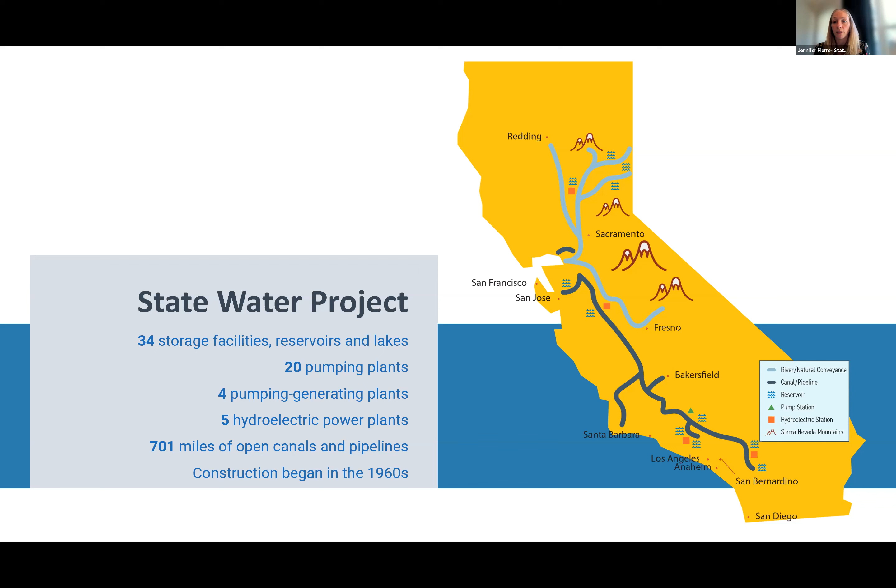Just as a quick background, I'm sure many of you know this, but just to orient ourselves, this is a cartoon depiction of the State Water Project. We conserve water in Lake Oroville up here, and it's delivered down the Feather River to the Sacramento River into the Delta. Then this is the South Bay Aqueduct that takes that water to Alameda County and other agencies in Northern California. From there it moves farther south into the Central Coast branch, over to Kern, East Branch, West Branch, and LA. One thing I want to point out is that we have a huge number of storage facilities, pumping facilities, and hydroelectric generation. So while we're often very focused on the Delta and on Oroville facilities, this is the largest state-owned water utility in the world.

Unfortunately, the Delta is not in a good state. I think environmentally and from a water supply perspective, it's continued to be a major challenge, and that challenge just continues to get harder and harder as the effects of climate change continue to increase and impact how we're able to operate in the Delta.

DWR estimates that the reliability of the State Water Project will continue to drop over the next 20 years, and it already has dropped about 20%. This is due primarily to climate change impacts like sea level rise, temperature management required across the projects, and other regulations occurring within the Delta itself. We'll talk a little bit more later about Delta conveyance, but this is the reason for the Delta Conveyance Project: to address these sorts of issues occurring in the Delta.

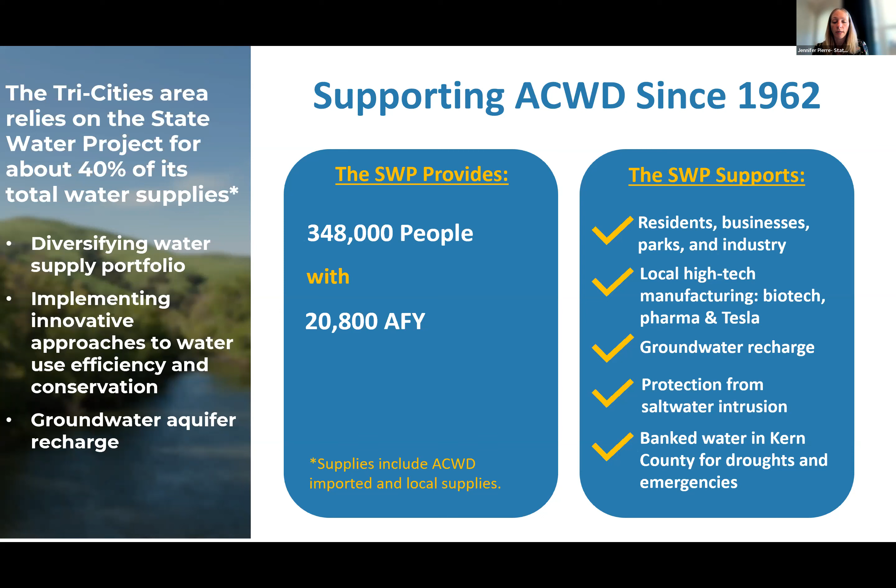So who are the state water contractors? My organization represents each of the public water agencies, including Alameda County Water District, who contract with the Department of Water Resources to participate in the state water project. The department owns the state water project and holds the water rights, but we, as in you and other agencies, pay all of the costs associated with it. So we work very closely with the Department of Water Resources. They are the owner and operator, but we have a very keen interest in how it's operated and maintained, to ensure both public safety and water supply at an affordable cost.

There are 29 public water agencies that contract with the department for participation in the state water project. 27 of those are members of the State Water Contractors organization. The two that aren't are up in the north: Butte County and Plumas County. The primary reason is that their issues tend to be very different than the issues for others that are diverting water from the Delta, so there's not a good alignment for them to participate in the type of work that we do.

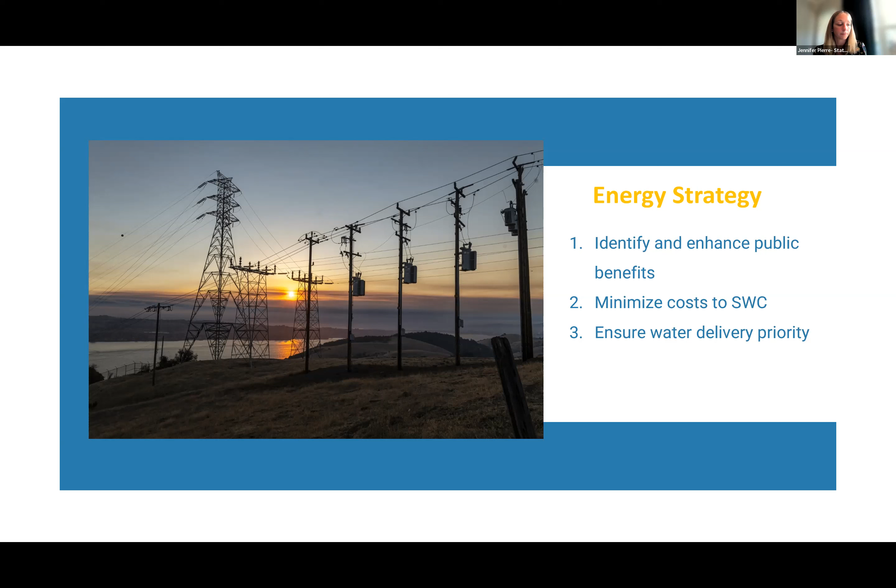Before I go to questions and answers, I want to share this. Coming back to the Delta Conveyance Project, I didn't want to leave without sharing this. This is a very quick 2-minute video that explains the project.

The Sacramento-San Joaquin Delta is the hub of California's water supply and a linchpin of California's state water project, where water from the Sierra Nevada... Jennifer, I think we're not seeing it on the screen here. Oh, that's okay, maybe I don't know how, was it working when it was smaller? Exit. Okay, maybe exit the PowerPoint and click the link. Let me go to... give me a second. I will go to my website. I don't think that worked. Can you see it now? Yes, it's small, but we can see it. Okay, what about this? Perfect, okay, I'll start from the beginning, sorry about that.

The Sacramento-San Joaquin Delta is the hub of California's water supply and a linchpin of California's state water project, where water from the Sierra Nevada mountains gathers to be delivered to 27 million people that rely on the water to run their homes, farms, and businesses. But the state water project's outdated infrastructure in the Delta is at serious risk from threats like sea level rise, earthquakes, and levee failures. As the state's rainfall increasingly comes in big flashy storms in between extended dry periods, we must invest in modern infrastructure that allows us to capture and store water when it's wet for use when it's not. Let's face it, our climate is changing and we need to change with it.

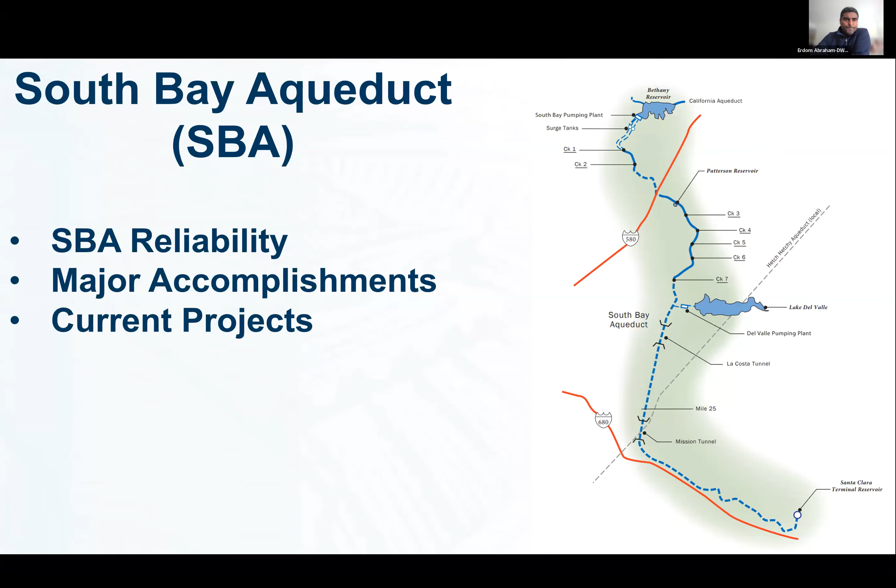So I'll start with the power supply for the South Bay system. DWR at Delta Field Division has 2 power sources that we get from PG&E. We have redundancy on the main power supply. It's a 230 kilovolt power that supplies banks. And from these 2 lines, the facility can run basically with 1 power supply, but we have redundancy on that system. And then we have a 230 kV bus that actually supplies power specifically just to South Bay.

And from this 2 line, we have step down transformers. Again here we have 2 redundant transformers. South Bay can really run with just 1 transformer, but we do have a second backup power transformer, or if you want to take out 1 unit for service, we have that flexibility as well. So from this 2 transformer, the power runs through a 69 kV transmission line. Basically, we stepped it down from 230 to 69 kV. And then once it gets to the South Bay pumping plant, again here we have a redundant transformer that steps down from 69 kV to 4160 that provides power supply to all the units here in South Bay pumping plant.

Again, here we can run the entire facility with one transformer. The second transformer is always a backup, or we can have half of the plant run through one transformer and the other half through the second transformer.

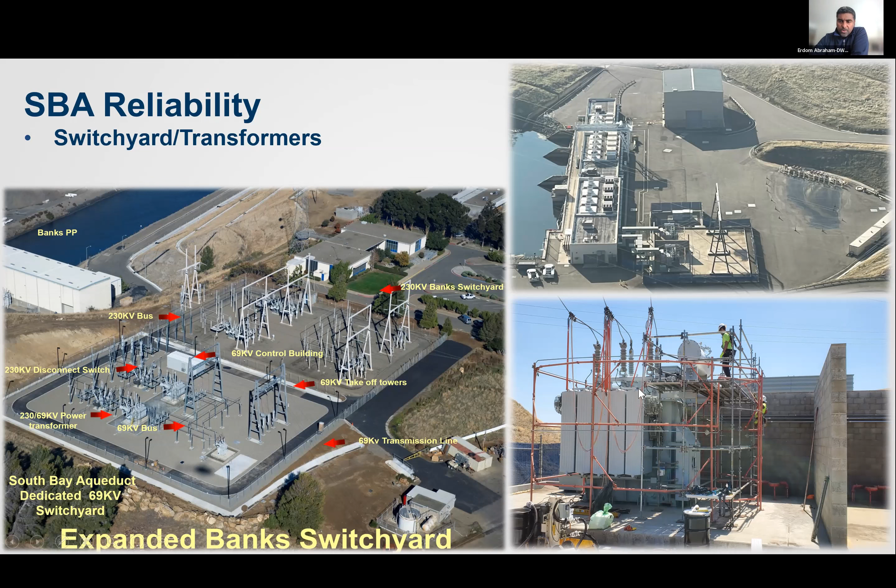This is just an example to show you when we had a refurbishment work done on the transformer, we had the second transformer providing power to all the South Bay units. We just wanted to provide a little bit more info in terms of power redundancy at the pumping plant.

Moving on to the units, the plant has 13 units to provide power and water supply to the South Bay system. The collective capacity for all the units is about 511 cubic feet per second. The maximum design capacity for the pipeline system and the canal is about 380 CFS, so we have almost about 140 CFS spare.

That was because Zone 7 was planning to construct a pumping plant by Dyer, and that did not happen. So we still have that additional CFS available for South Bay water contractors, but we can't push more than 380 CFS at this point. In addition to the spare units, we also have unassembled units ready to replace any unit that fails during normal operation.

So we have about 3 units on standby, which are disassembled and kept in a storage facility that we can put into service anytime. This provides a little bit more information in terms of the flexibility we have in the pumping plant.

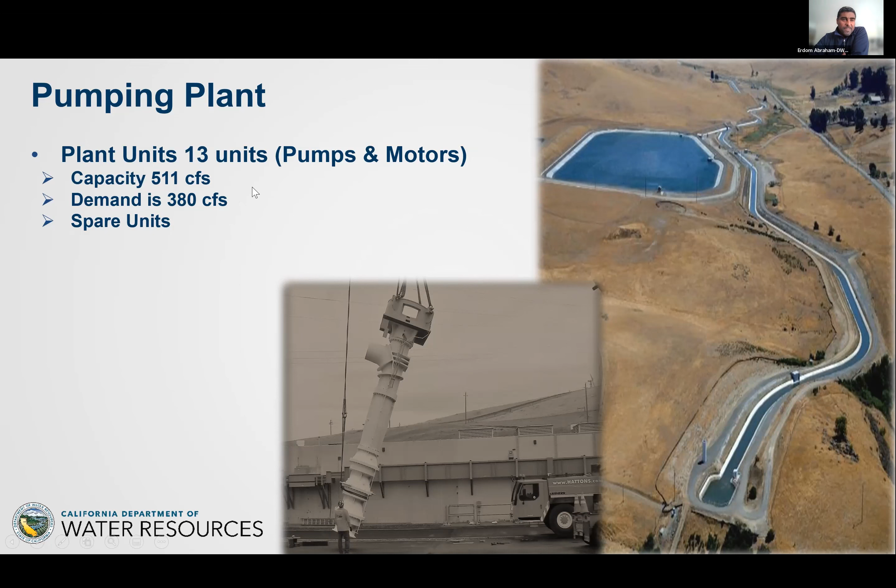Moving on to the conveyance facilities, South Bay was constructed almost 60 years back, but we do have a good condition assessment program where we inspect the pipeline and conduct aerial surveys to ensure construction, development, or private owners do not encroach into our facilities without proper permits or notification.

Typically what it does is increase the coefficient of friction, and flow through the pipeline is reduced by some number. This typically affects the pipeline downstream of Bayside. For example, for Santa Clara, the maximum design capacity is 184 CFS, but we cannot push 184 CFS because this lining is actually a little bit rougher. So that's something we continuously work to remove this material whenever we get an opportunity or when we do the condition assessment.

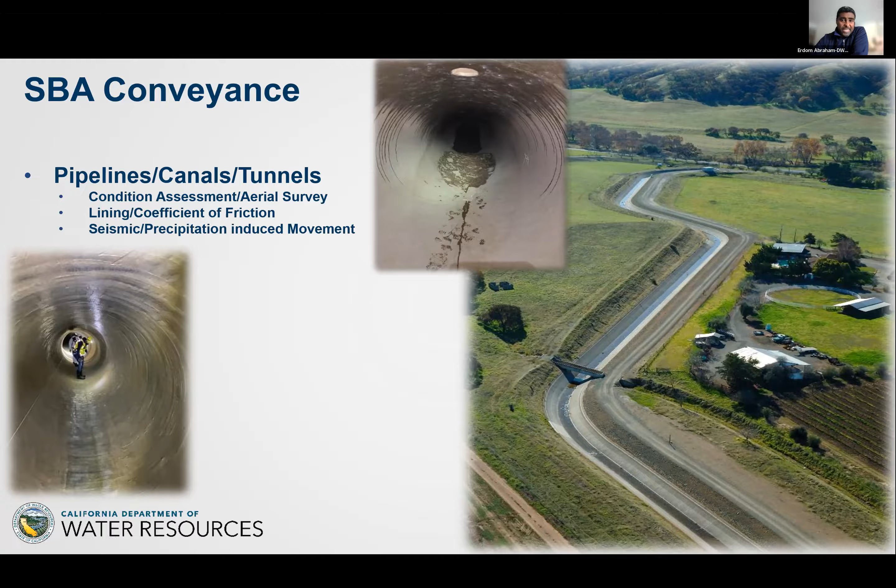The other issue we typically have is sometimes seismic or precipitation-induced movement. This again impacts majority of the Santa Clara pipeline, nothing on Valley Water or ACWD side. We don't have that much significant issues, but most of the Bayside, all the way to Santa Clara terminal tank, we have some dormant landslides. These are actually 3 dormant landslides we're currently studying: milepost 36.3, milepost 37, and milepost 38.

We're consistently putting in instrumentation to ensure this landslide is not active and moving.

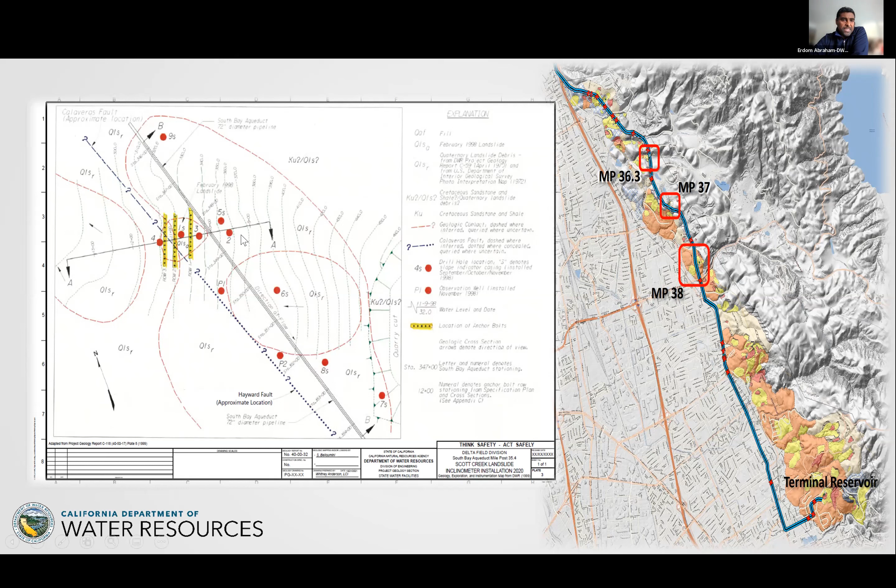So again, this is on Santa Clara. Most of the landslides are actually located below Bayside Valve, but we continuously monitor this red dotted line. These red dotted points are instrumentation for real-time monitoring. It gives us good information as precipitation happens or seismic activity happens - we get real-time data.

This is one specific example for one of the instrumentation sites. Right after the December rainfall, in January we started seeing a little bit of movement, and this was actually recorded in real time - this was back in January 19th. We got a signal that the hillside actually moved about a quarter of an inch. Then back in February 24th, we got another signal that it moved by another quarter inch. Typically our pipeline is shown here in blue, and the instrumentation lets us know which section actually moved. So this is something we're actively monitoring on a real-time basis.

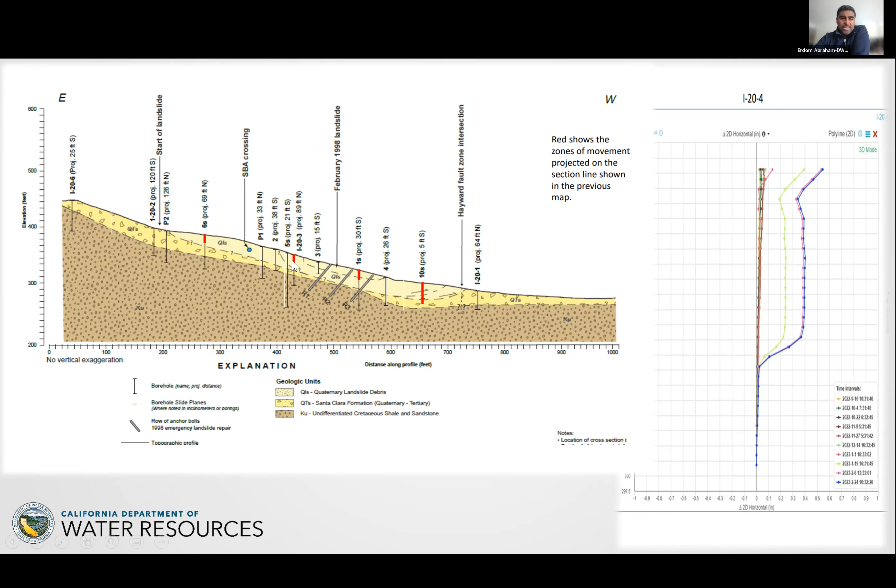This is just an example.

Some of the key accomplishments we've achieved in the last 2 years, especially on Bethany Dam: we had a series of burrowing animals creating issues along the face of the dams. Due to environmental challenges in the state of California, we were not able to permanently remove the rodents from the face of the dams.

So one of the measures we took was installing a steel wire mesh that is rubber coated. We removed about 2 feet of material from the face of the dam and applied this wire mesh so that squirrels or rodents do not burrow into the face of the dam. We armored the face of the dams, and finally achieved a well-protected dam so that burrowing does not occur there.

The other issue was on the aqueduct, especially during the drought when we're not pushing a lot of water. In summertime heat, we get a lot of algae bloom and aquatic weed that affects the screens we have at check 2 and check 7. These are transition locations between the canal and the pipeline, where we typically have these 2 check structures with traveling screens.

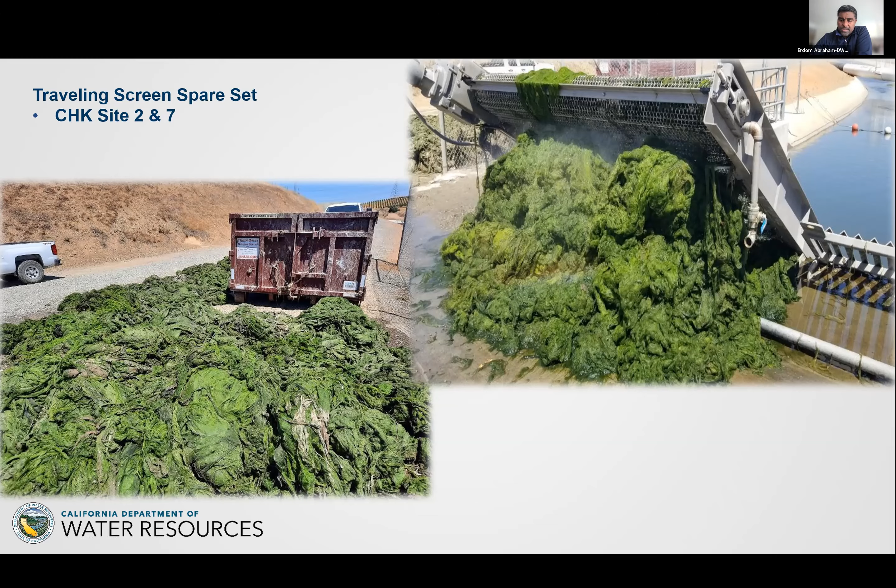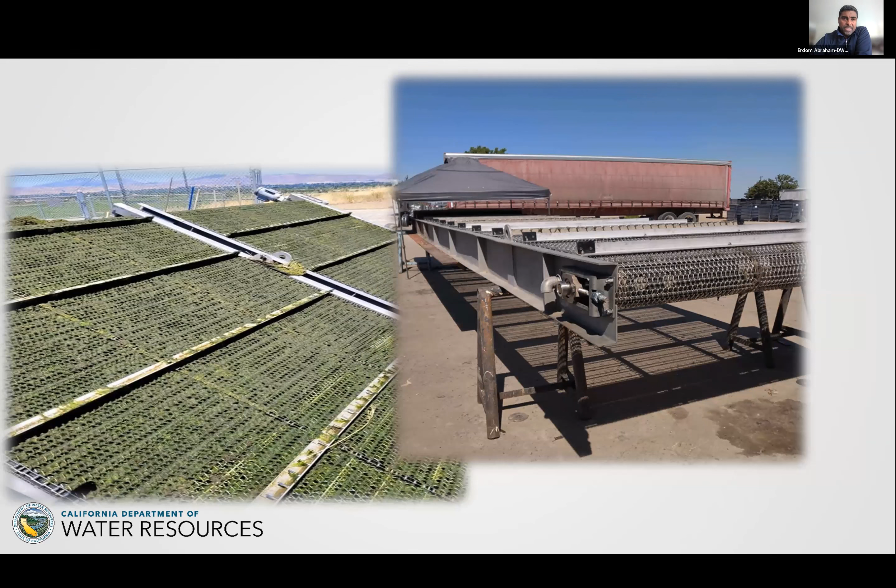So in 2022, we were able to secure additional screens so that when we see this kind of situation, we can go in, remove the damaged screen, and put in the replacement screen. This was something we achieved in 2022, having a spare screen on site ready to go at any time for check 2 and check 7.

The other significant change we made was in how Dyer was operated. As you all know, water is transferred or conveyed from stage 3 only to Dyer. There's no interconnection between Dyer and the South Bay aqueduct system. This is Dyer reservoir, and this water is only from stage 1 and stage 2.

When stage 3 was constructed, water was delivered to Dyer, and from here there was an outlet planned for zone 7. The future treatment plant was supposed to be constructed here and still is not yet constructed.

So what we've done for Dyer operation is cycle Dyer reservoir whenever the treatment plant reduces their flow by 15 CFS, 30 CFS, or 45 CFS. Instead of shutting the unit down, we cycle from Dyer to help alleviate the frequent start and stop of units. This has actually improved the water quality at Dyer, cycling the water and bringing it to a better condition.

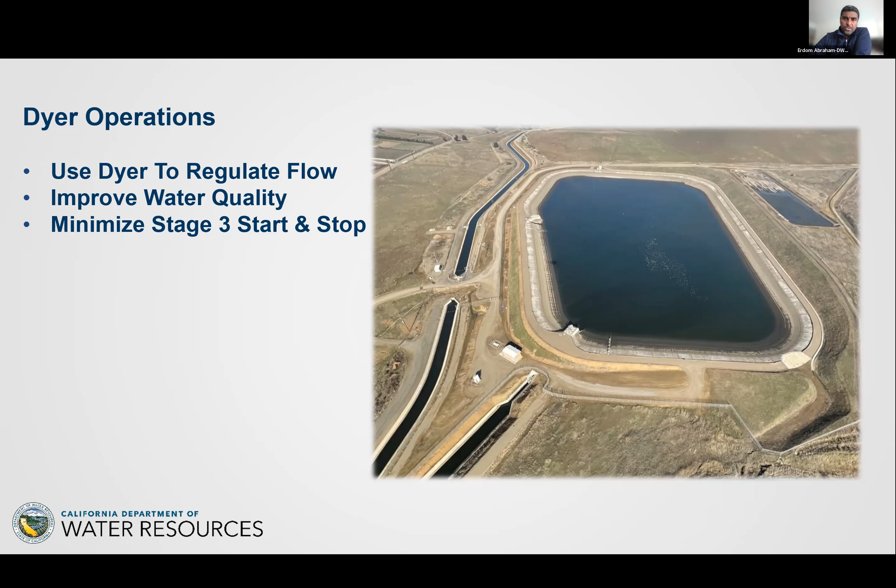The other achievement in 2022 was completing the asset management plan for South Bay. This plan has a 10-year inspection plan, and we've communicated it with all 3 South Bay water contractors in terms of what the needs are. The outages have been developed and communicated so we can do the needed and planned inspections for the next 10 years.

The asset management plan also identified about 27 actions that need to be completed. These include key performance indicators, KPIs, that we need to develop to meet our asset management goals. The plan also identified critical spares we should have on hand to restore service in case of any failure of parts. This was communicated and discussed with the water contractors.

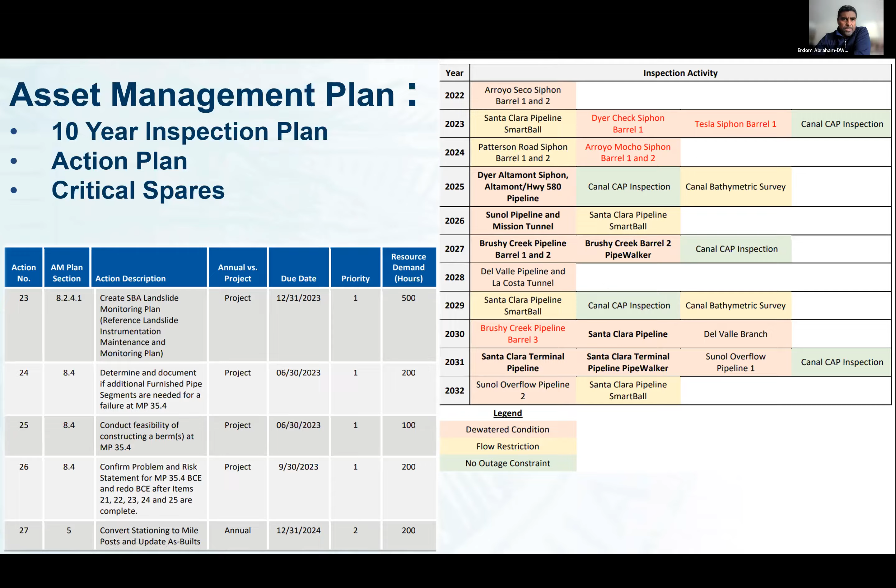Also, as part of the maintenance management system, DWR has acquired handheld tablets that staff actually use in the field. They use this to complete their work orders, tasks, and document on site so that information is actually recorded on site instead of coming back to the office and completing it on their desktop. It also gives them the ability to access drawings and manuals. If they're in remote sites, it gives them the ability to access drawings on site.

Also, some of the staff are actually using them to communicate through Teams or Zoom between engineers and staff that are actually in the office. It provides them a quick communication tool as well.

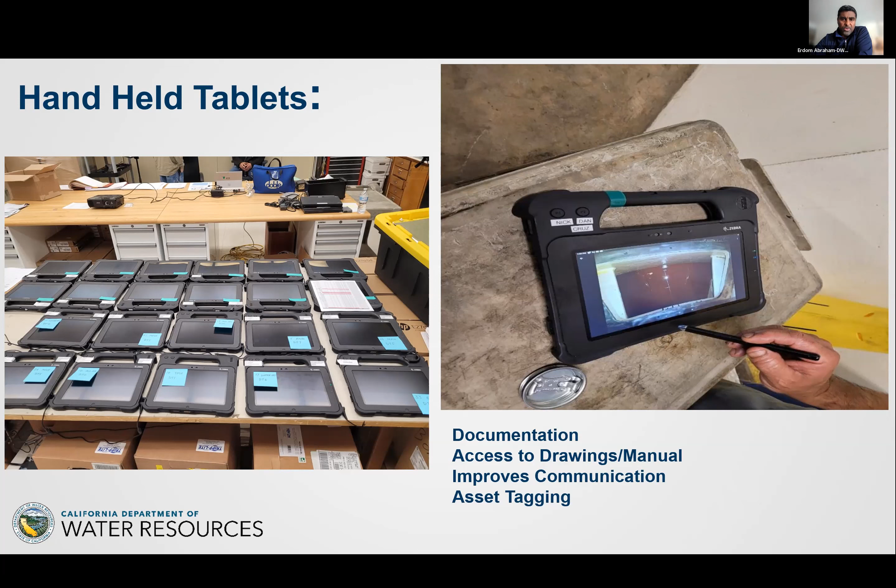The department in 2022 completed tagging a lot of the assets. Almost 4,700 assets were tagged between California Aqueduct, South Bay, and North Bay facilities. Staff can now scan and provide that information, or a drawing could be looked up right away, or a manual for that particular device.

Current projects and activities that are going on, especially upstream of Santa Clara pipeline. I know there's a lot of activity happening on Santa Clara pipeline because of the landslide and seismic induced movements. But a lot of the activities actually upstream of Bayside are in relation to automation of Del Valle pumping plant. As you all know, Del Valle pumping plant was the first and oldest pumping plant to be built right next to South Bay pumping plant. So it does need a lot of automation to have a little bit of flexibility for O&M.

Currently, we have to send an operator from Delta Field Division to ramp up or reduce flow from the Del Valle pumping plant. So this is actually currently happening. We're on target to get this project completed within the next two years.

The next is also automating the Bayside turnout, the Bayside valve. This is a 72-inch valve. And the criticality for this valve is if there's any pipeline failure on the Santa Clara pipeline side, we have to ramp down all the flows for Valley Water as well as ACWD. To minimize that, what we're trying to do is have a remote automated Bayside valve, so that it does not impact Valley Water and ACWD.

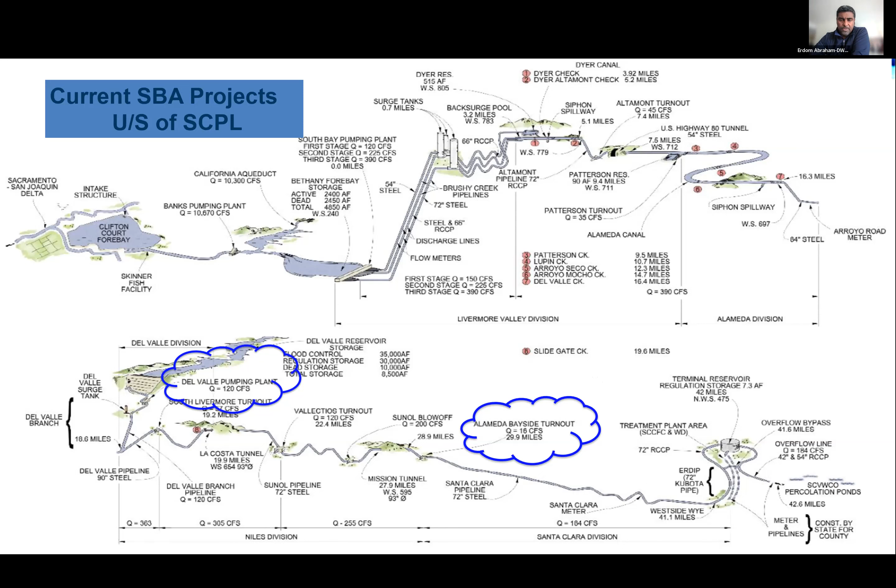We have asset management that is actually moving in high gear. We have a lot of work that is happening in the pumping plant, but in terms of projects, these are the two projects that we're heavily working on in the last 2 years, and will be going on for the next few years as well. That's all I have presentation to share. If there's any question, I'll open it up for questions.

How much money is programmed for the corrective actions you've identified in the most recent survey of the South Bay Aqueduct? Are we talking about the landslides, or the total project? And then a follow-up question will be the allocation of those costs to each of the South Bay Aqueduct contractors. Is there a shared cost, or is it a dedicated cost to Santa Clara, to the Valley Water District, for the Valley Water District reach, where they're the only beneficiaries?

Yes, it is actually shared. It's shared for anything that is upstream of Bayside, that would be shared for all. Anything downstream of Bayside would be Valley Water specific, it won't be shared. If we do any work downstream of Zone 7, it would be shared by Valley Water and ACWD. Most of the work that we've done in the past few years was specifically for Valley Water.

We've been having multiple leaks in a year for the period before 2020. We wanted to minimize those unplanned outages, and the effort was spent the last 2 years to really minimize those. Those costs were actually for Valley Water, and some of the work that we've done upstream were shared.

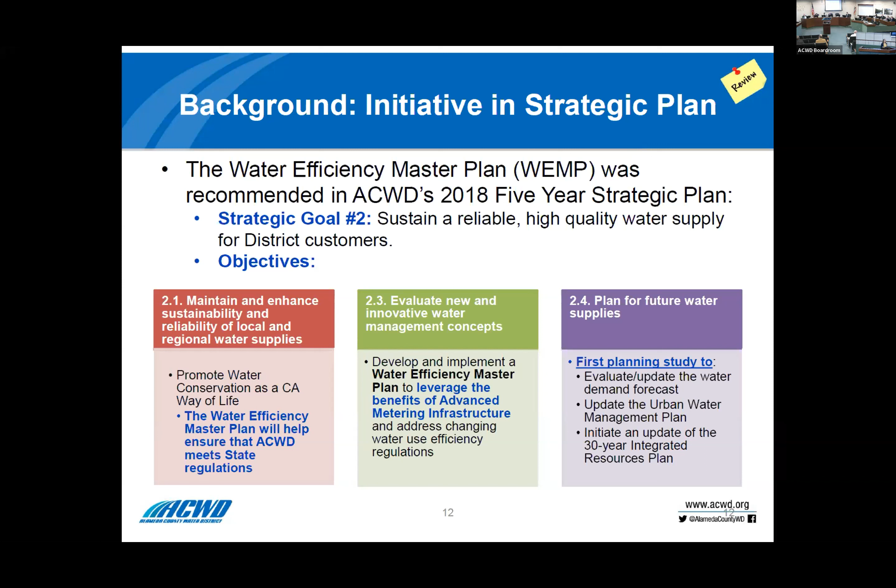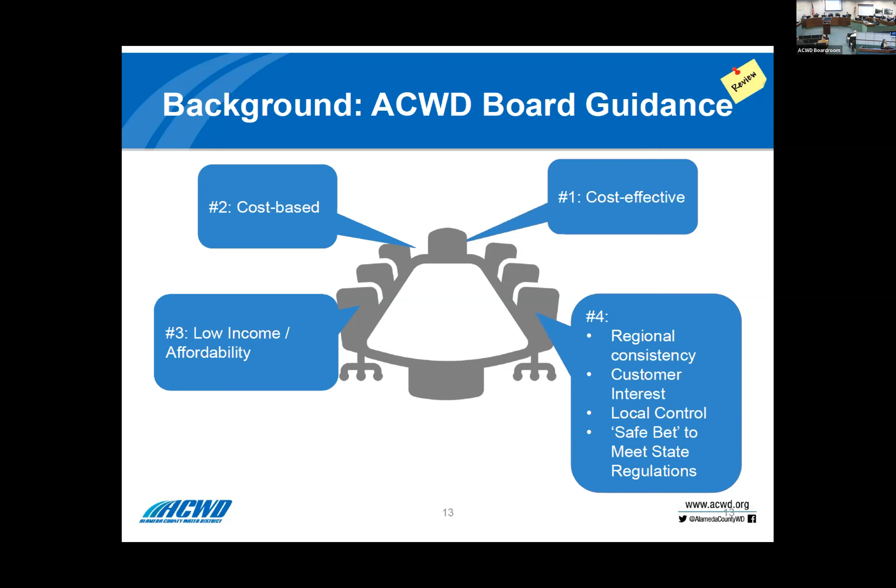And you may also recall that the board provided a lot of guidance on the measures or the programs. We use those terms interchangeably, but really the measures are like a toilet rebate program or a weather-based irrigation controller program. So we asked the board to give us input on what were the top things we should consider when choosing measures: cost effectiveness, just overall cost, does it support our income-qualified or low-income customers or help with affordability, regional consistency, customer interest - do they want to participate in these programs - local control, and then again, the regulations - will it help us meet those regulations?

The total number of measures in the plan are 16. And what we did was we put in measures that we thought would help us with the state regulations, even though they're still under development - commercial, industrial, institutional programs or measures, and outdoor measures. There's been a lot of changes to the state regulations since then, and they have really honed in on indoor more than we expected. So that's another thing that we're going to need to look at when we do a revisiting of the demand forecast and the WEMP itself.

The water efficiency master plan was meant to be adaptively managed and flexible, taking measures out and putting new ones in. We have to be nimble because the technology is improving all the time and things are changing. We need to be ready to address it. But we have this construct to work within that the board provided guidance on.

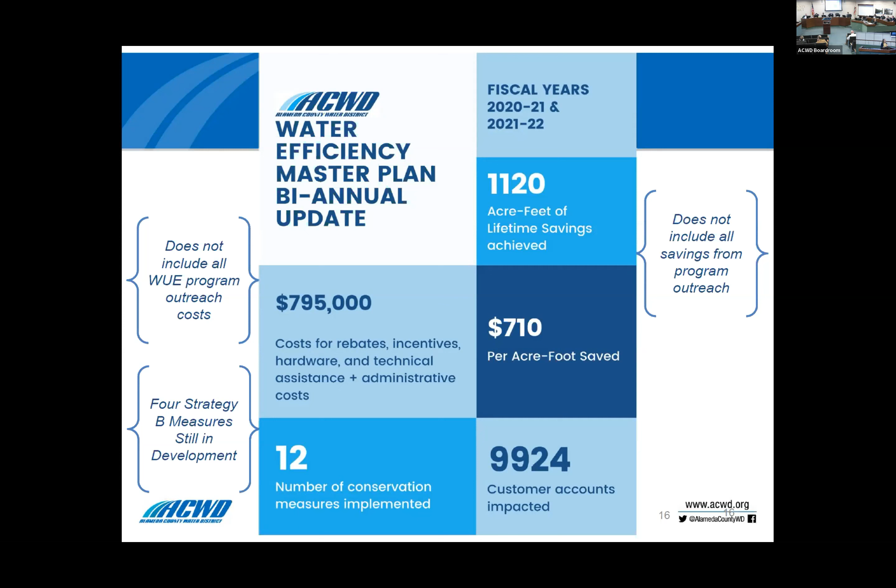So let's get on to the next slide. We'll show the comparison between what we had targeted, our goals for the water use efficiency program, compared to what we did. We're still within, actually below, the cost per acre foot. We're about half the savings that we anticipated we wanted. Again, our savings number in the previous slide doesn't capture everything—we have some work to do to hone that in a little bit more. And the costs are substantially lower than what we estimated we would be spending.

So again, it's not an apples to apples comparison. Like I mentioned, we don't have all of the savings that we achieved from water use efficiency measure specific outreach—we can't separate that out quite yet.

Another thing is we had a measure, the residential indoor water surveys measure, that was not part of strategy B. It wasn't part of it because of the cost effectiveness—about $3,000 to $3,200 per acre foot was what we estimated in the DSS model. However, we have that measure for some customers, like our Water Savings Assistance Partnership Program for our lower income customers. They can get an indoor water use efficiency survey folded into that program, and it's cost effective for us because that also does toilet installations, leak repair, and other measures.

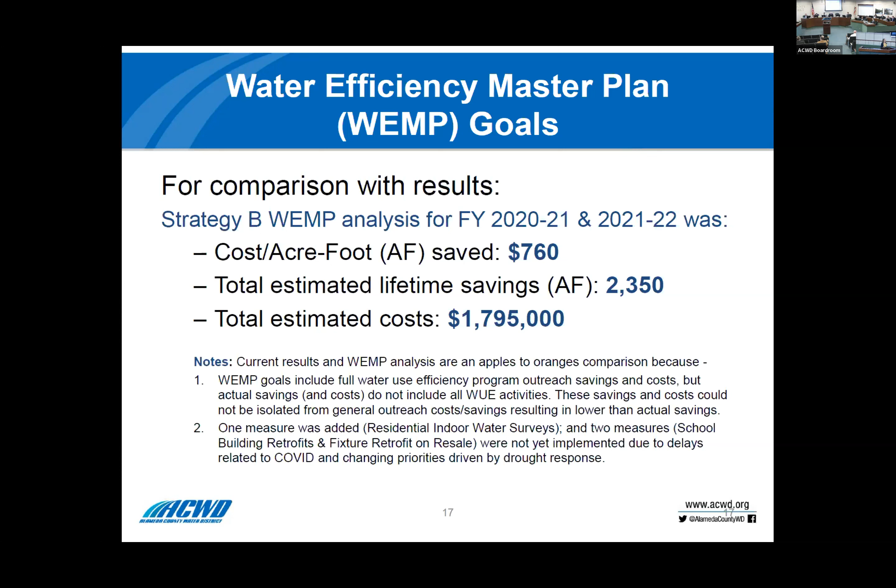We also had a drought, which took a lot of time and energy from our team, running the ordinance enforcement. So that took away a little bit from the water efficiency master plan implementation, even though we still got savings from that effort.

All right, so now we're going to go into some implementation details, summarize what happened over the last couple of fiscal years, and some more detailed information about what the savings were for each measure. But I'm going to hand off the presentation to Giselle Delgadillo, our water use efficiency specialist. So come on up.

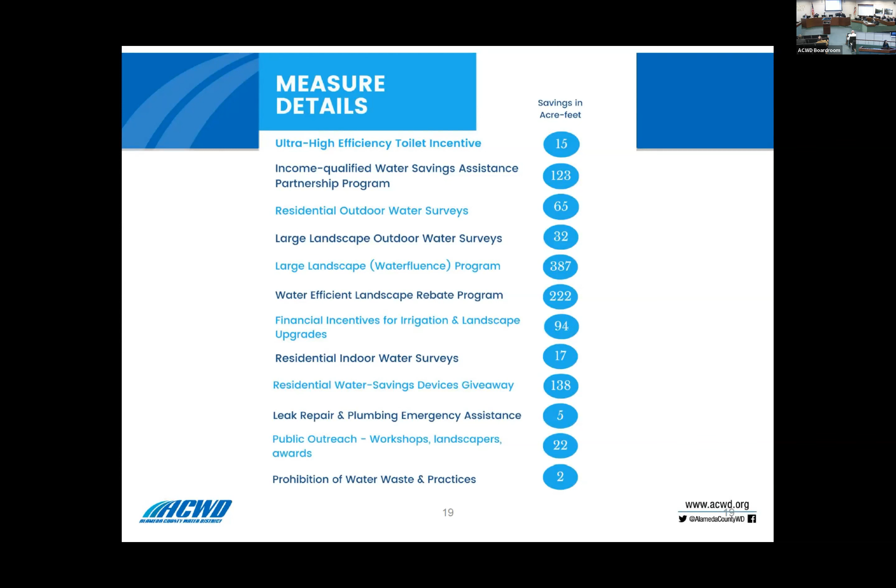Thank you, Stephanie. So here you'll see the 12 active measures and their respective lifetime savings in acre feet. You'll see some of our popular rebate programs, such as the Water Efficient Landscape Rebate, and some other programs like our Income Qualified Water Savings Assistance Partnership Program.

So the past couple of years have been quite busy. This slide shows some key program highlights from the 2020-2021 fiscal year. Staff adjusted all of our conservation programs to be able to continue to provide them to our customers during the COVID-19 pandemic. Staff also implemented new measures such as landscape contractor trainings and the Rachio Smart Sprinkler Controller rebate for our residential customers, and updated existing measures such as offering our landscape workshops online to accommodate restrictions due to the COVID-19 pandemic.

In terms of drought, a lot of drought work began to ramp up. Staff coordinated with our public affairs team to develop the One Saves Water campaign and develop specific resources for each customer type. Staff became heavily involved with the development of the AMI customer portal and closely monitored and participated in the development process for the state water use objectives. In 2020, the district was awarded the Environmental Protection Agency WaterSense Award for promotion of WaterSense labeled devices via our rebates and programs.

And this slide highlights key initiatives that took place in fiscal year 2021 and 2022. This year was very busy due to drought. We saw that customer inquiries and water waste reports were at 5 times pre-drought levels. Staff continued to implement new measures such as the irrigation hardware rebate program that we offer all customers, and continued to update existing measures to enhance them for drought.

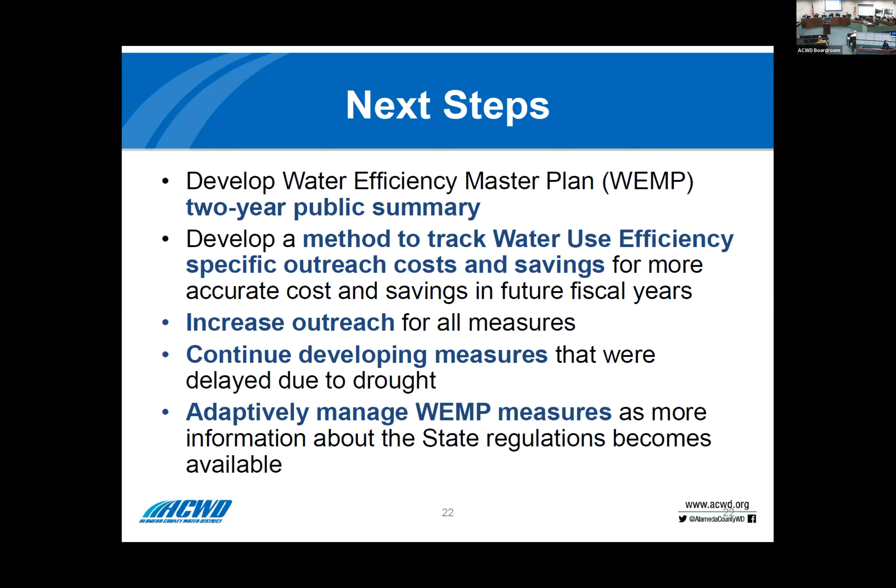So in terms of next steps, staff will develop a water efficiency master plan 2-year public summary, and as mentioned, work to develop a method to track outreach costs and savings that are specific to water use efficiency efforts to have a more accurate cost and savings in future fiscal years. We'll also increase outreach for all measures and continue to develop measures that were delayed due to competing priorities with drought, and adaptively manage measures as more information about the state regulations becomes available to ensure that our measures are helping the district move forward to meeting the water use objectives set by those regulations.

And now to provide an update on the state regulations, I'll pass it on to Megan Marino, who's also a water use efficiency specialist.

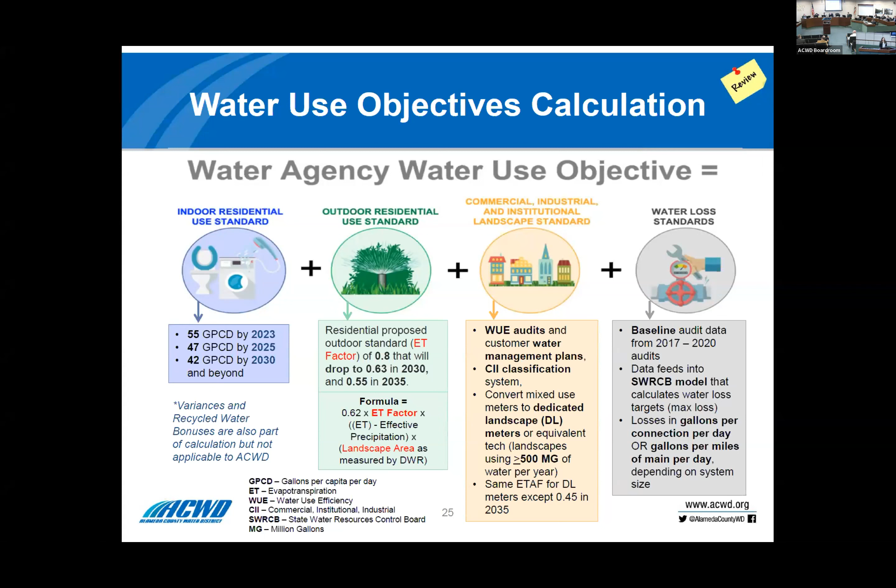They held their first workshop yesterday, and as far as implementation going forward, they are expected to adopt a rulemaking in fall of 2023. The following year in January, we will be calculating our water use objective. And in 2027, we'll need to actually meet that water use objective. Later that year in 2027, if we don't meet that objective, we are subject to written notices, conservation orders, and potentially fines.

This slide is really just to highlight ACWD has been heavily involved in this process over the several years that it's been going on. We've participated in several different ACWA working groups and provided comment letters, written and oral. We've participated in CUWA's Water Use Efficiency Committee meetings, as well as worked with the California Data Collaborative and other agencies, including BAWSCA.

So will we meet this water use objective? Using DWR's recommended standards, we did an analysis and found that we would not be in compliance with our water use objective in 2030. Now, the State Water Board had made changes to that initial recommendation. So the past few days, we've been working to model what our standard would look like and if we would achieve that. Using the proposal as it is now, we also found that we would not be meeting our objective in 2030, and we would continue to not meet that objective in 2035.

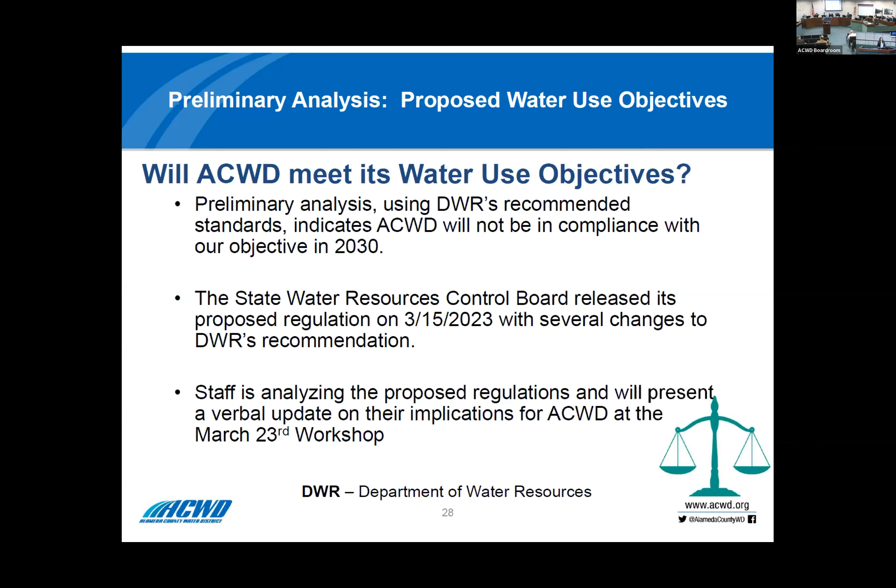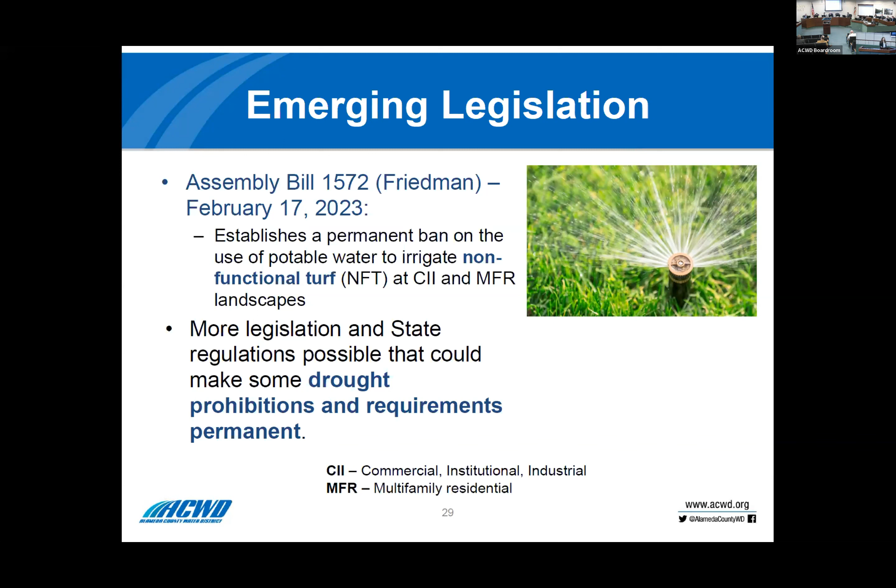Finally, I just wanted to highlight this is not the only emerging piece of legislation that's ongoing for conservation. There was another bill introduced related to permanently banning the irrigation of non-functional turf. And we'll have to see what happens with drought prohibitions and if any of those requirements become permanent. So I'll invite Stephanie back up to field questions, but we're all happy to answer any questions that you have related to this.

You used the term lifetime. How many years is a lifetime? Well, some measures are permanent. The savings is permanent, but our lifetime savings goes out to 2050, 25 years. So we're talking about roughly 50 acre feet per year as the savings of 1,120 over 25 years. So, and we sell about 3,000 acre feet a year. So it's about 1.5% of our total water sales.

Thank you. Thank you for a great presentation, and it's actually really nice to see projected savings and that we're actually doing better than projected in terms of cost per acre feet saved, right? That is cost we could avoid regardless of what percentage of our overall water supply we're saving, right? We look at it on an individual per acre feet basis, we're coming out ahead. So thank you very much for a lot of work, a lot of analysis. So good to see the update and keep up the good work.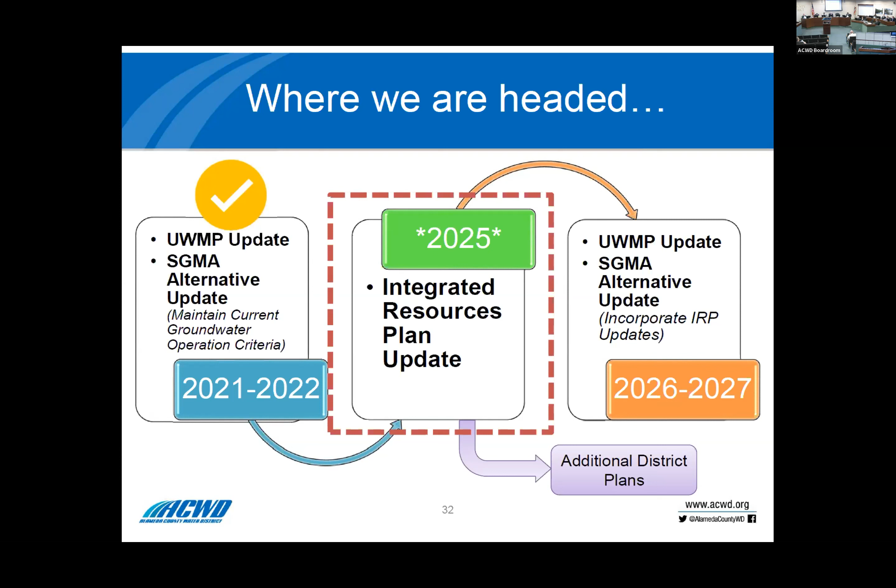And on the bottom right in purple, you'll see a note that the IRP will also feed into additional district planning efforts, be that the engineering report or other emergency planning efforts. There's a lot of things tied together here. We wanted to put that in perspective, the larger roadmap on where we're headed in the next several years.

So with that, I'm going to turn it over to our last presenter, Thomas Nizer, our water supply and planning manager, to share what to expect next and another fun topic we'll cover.

Thank you, Laura. It just dawned on me that we should probably consider 2026 the beginning of the next 30 years of potentially an aggressive new implementation plan, depending on how enterprising this board chooses to be over the next 2 years. As we recall, we are initiating the IRP update.

We're calling it our water resources master plan, using the generic term right now. And we recommended a 2-phased approach, with phase 1 being the coming year ahead of us, roughly a 12-month period.

We have begun the consultant selection. The RFP for that is closed. We've had a couple of very good proposals and we're in the process of reviewing those. I believe at this point we're looking at late April for a decision, given the process. We're doing a very rigorous interview process, given the intimacy of the relationship we'll have with this consultant, working closely with the board and the community.

But once we complete that, the intention is to begin immediately. Recall that process will involve very heavy public engagement and development of stakeholder groups, working with the board and bringing that public information to help inform the board in establishing goals and objectives for the next master plan update.